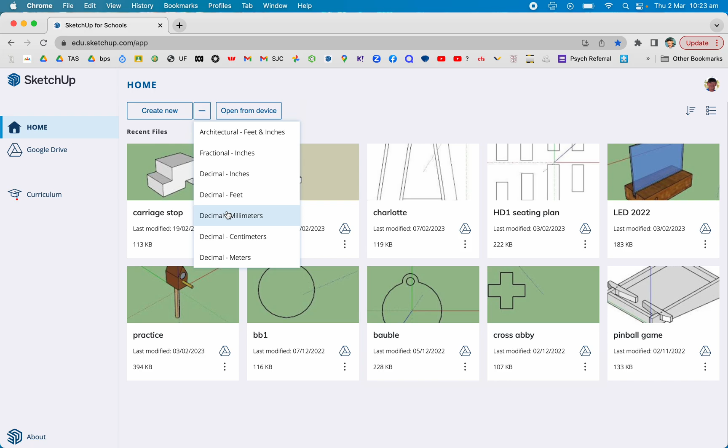So create new. Remember, it's got to be millimeters. Just double check on yours that you go to the i and check that it is millimeters. Okay, now I'll remove her.

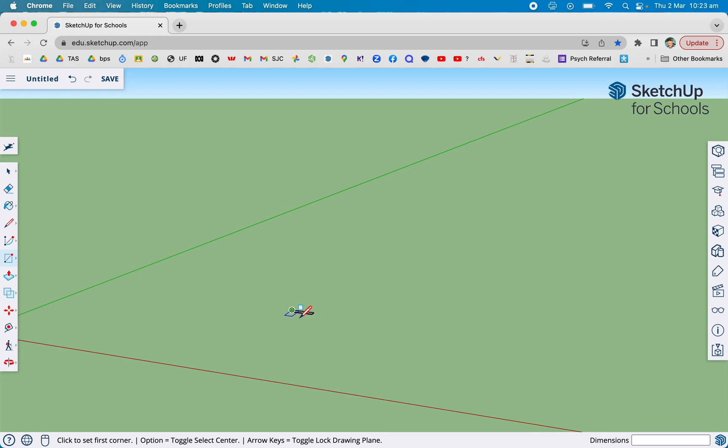My first little rectangle is going to be 100 by 20. So 100, 20, enter that. And I'll zoom in, bring it up 20.

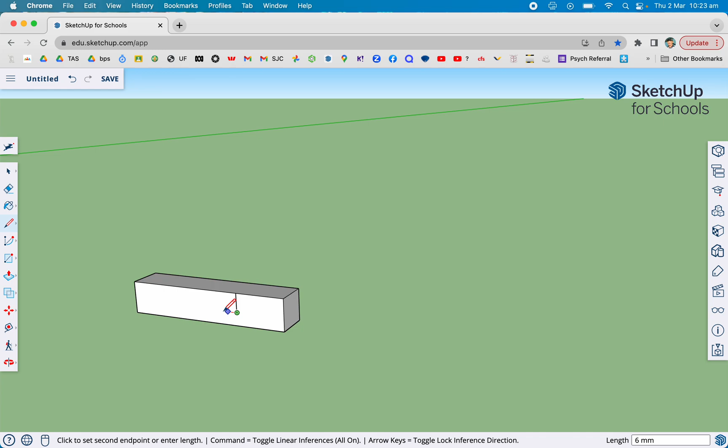And the little cutout, I'll just use the pencil. It's going to be back 30, so I'll type in 30, enter, go to the end point. Now it's going to come down 12, this other piece of timber is 12, so it goes actually more than halfway, and then it'll be 20 this way, and then bring it up to the top, and push that out.

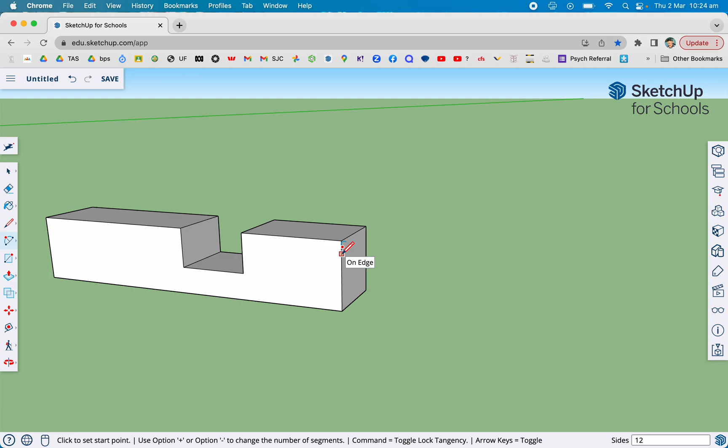Now I'm going to put a little curve on the front, like the little one that's in the workshop. So I'll go to here, and I'll pick the two point arc, and just randomly pick somewhere, touch that one, touch there, and then move your cursor around. See how it goes all over the place? But when it snaps onto tangent to edge, then that's going to work. And I'll push, pull, and take that out.

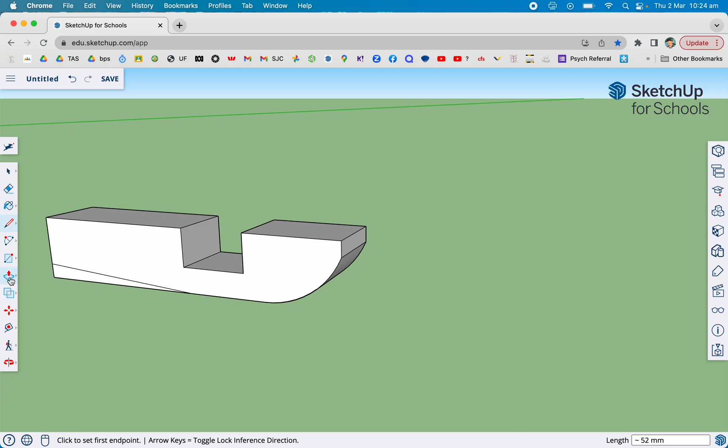Now if you want to vary it up a little bit more to make yours a bit different, you can. One might be to make it a little bit more streamlined. You don't have to do this, but if it's too easy, you can play around a bit. Okay, that'll do for me.

I'll leave it at that for now, so I'll make a group of that. Make group, and I need two of them, so I'll make a copy with the move tool, hit the option button, and move it to the side a little bit.

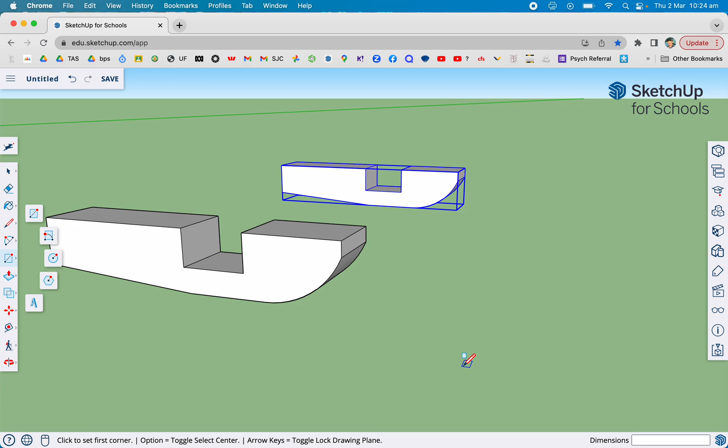Now I'm going to draw the little cross piece, so I'll get my rectangle tool again. I want to draw it in this position so I don't have to rotate later. I'm looking down the bottom and it's got the small number first, so the small number will be 20, and the long number is going to be 100. Right, so there's that. And this one's going to come up 12.

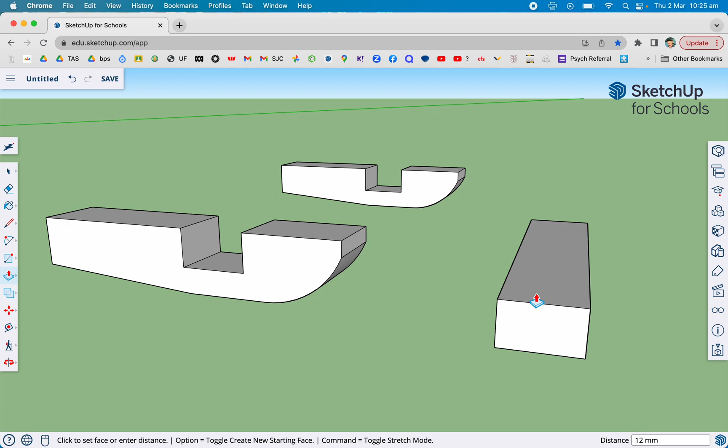Now I need that slot through the middle for the sail to fit in, so I'm going to turn that around a little bit, and it's going to go in here.

So I'll get the pencil tool, and I'm going to come to the center, the midpoint, and come down 6. Then I'm going to go that way 3, escape that, and come from there again and come back this way 3. I'm just doing that so that it's centered. There it is. And if I bring that up...

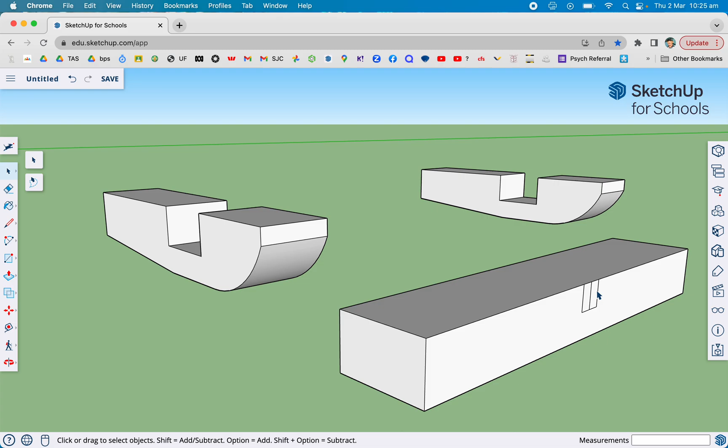I'll delete that little line, you don't need to, but delete that, and then push that out, and go back and touch the back edge when you're pushing it out so it comes in the right spot.

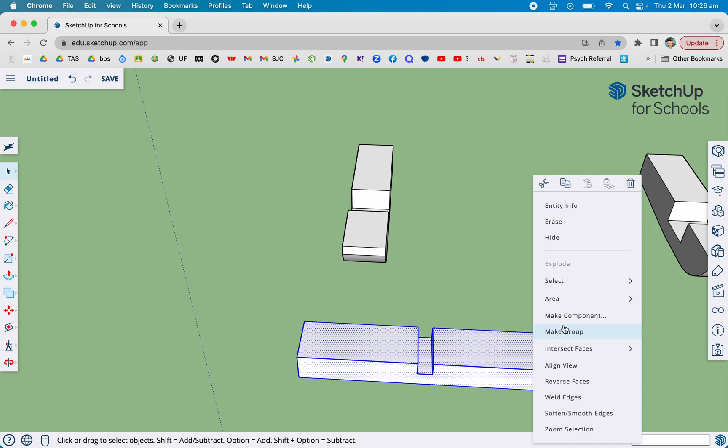Now that's finished, so I'm going to make a group of that one. I'll just put it in a position where I can select it, which will be okay there. Make group, swing that back around, and that will do the sail, and there.

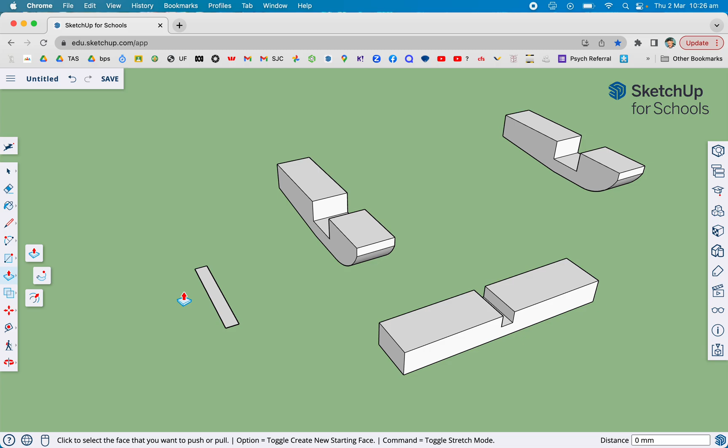I'll draw it in the right position, so I want it that way. So I want my small number first, which is going to be, oh no, it's the big number first this time. Big number first is going to be 50, comma 6, that's that. And I'm going to bring that up 80, there. And I'll turn that around a bit.

Now, actually I might do it from this side. Now I'll just randomly guess this, but I'll just pick that, push that out.

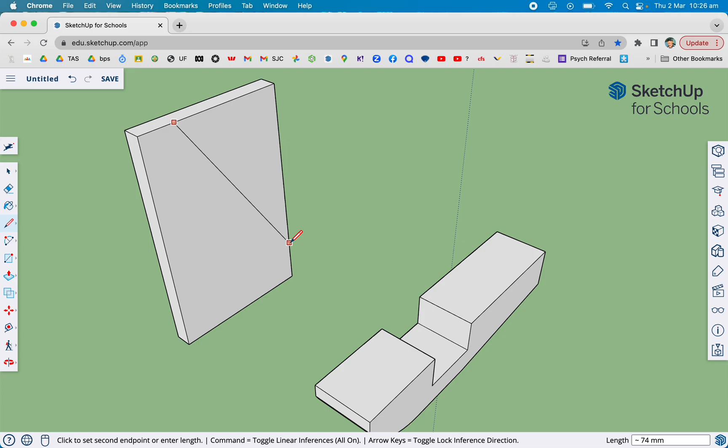It doesn't matter about measurements as long as it looks okay, that's the main thing. And I might just curve those off a little bit too, so get that 2-point curve. So start there, click there, move it around so it says tangent. That looks okay. We should be able to then push that out.

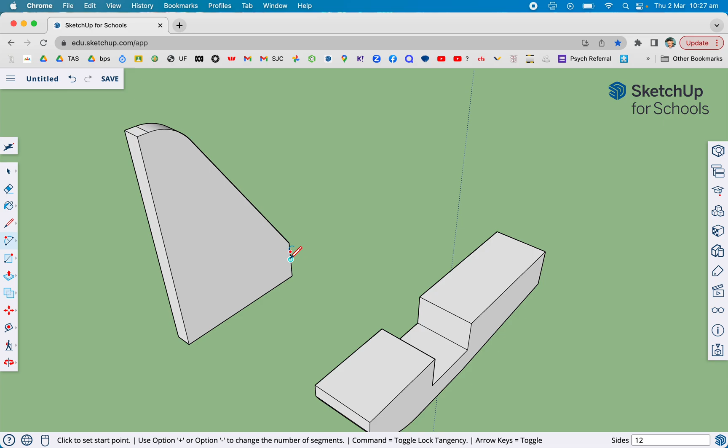If this starts to frustrate you and that doesn't work as well as it's working for me, don't worry too much about it. But I'll do the same thing down here. I'll go from, say, that point to that point, move in, and there's the tangent. Now push it out.

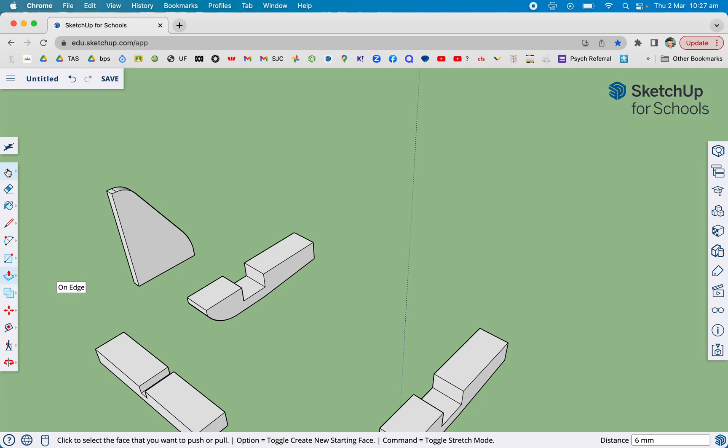And I'll go from there, and I want it to go that deep, so the other option would be to type 6. Okay, but that looks okay there. Bang. Yep, make a group of that one.

Now put it all together, so if I move, I'll just deselect that piece. Now, that point's going to touch that point, so I'll move that into place. This outside point, now remember you don't move it while the protractor's there, but that point will attach to that one.

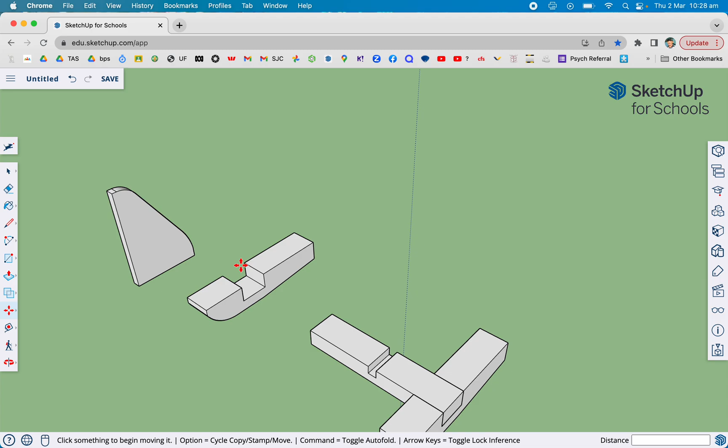And for this one, if I take that little one right at the front, that will do, and that's going to slot into this one there.

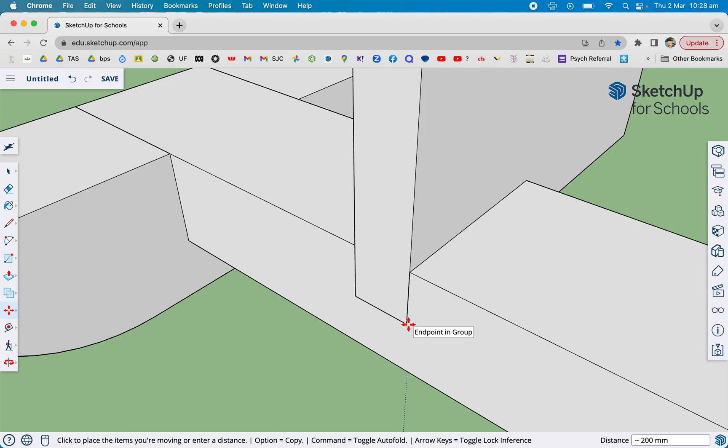Okay, now that's obviously drawn. If you want to then go and give it some colours, there's colours. I might just stick with colours for today. There doesn't seem to be too many there. Colours, there we go.

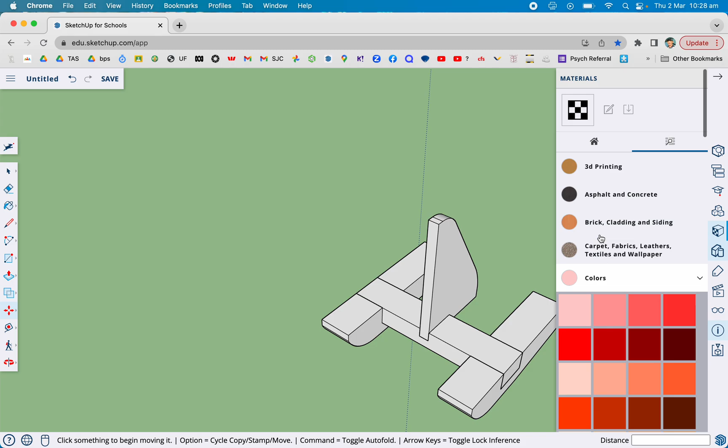How's that? Pretty flash looking. Okay, we'll get rid of that. Swing it around to a reasonable position so I can see the detail of it well.

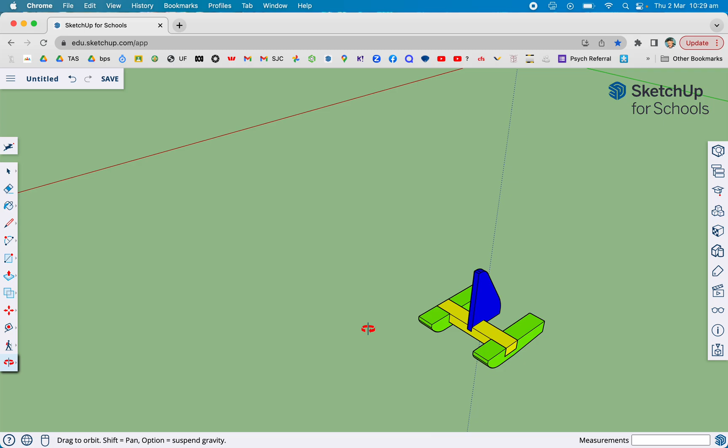Now see that line there? That is the axis. You can get rid of those. If you go to this set of glasses and see the axis are turned on, you can turn that off. So that's gone. And that's your drawing done. Well done.